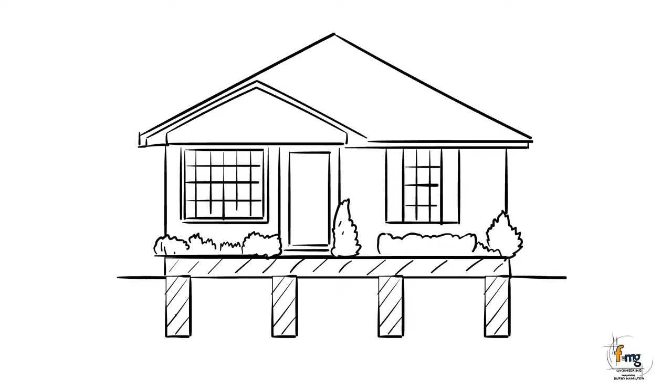In our first video about footings, we covered the basic principles of footing technology. In this animation, we will be focusing in more detail about the many different kinds of footings available today.

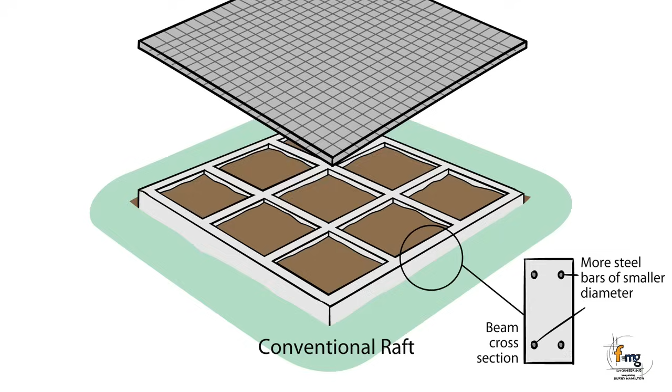The conventional raft system is a grid of concrete beams with steel inside that supports a concrete slab. The combination of a grid of concrete beams and an integrated slab on top is designed to form a rigid platform that resists the movement of the reactive clays underneath. Trenches are dug into the ground to form the grid shape in which steel is placed and concrete poured into to create the footing system. Pros: most common footing type for brick veneer dwellings. Great for reactive soils. Good on low-bearing soils. Has an integrated slab.

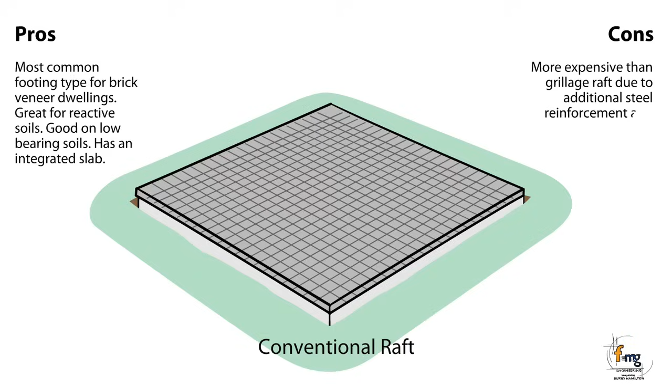Cons: more expensive than Grillage Raft due to additional steel reinforcement and concrete.

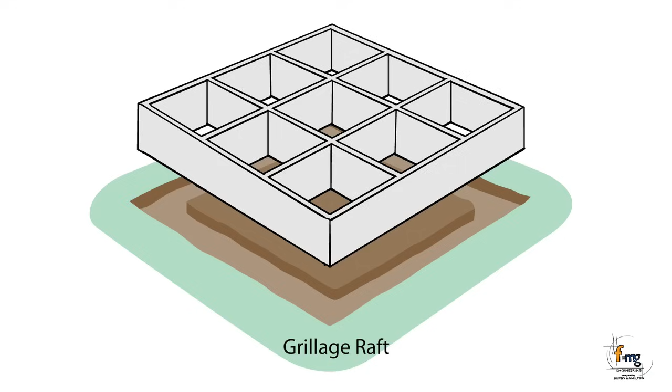The Grillage Raft system is much like the conventional raft. However, the beams are slightly narrower, deeper, and contain less concrete and fewer, but larger steel bars. A Grillage Raft has a more efficient design, but can be more difficult to construct due to the deeper and narrower beam.

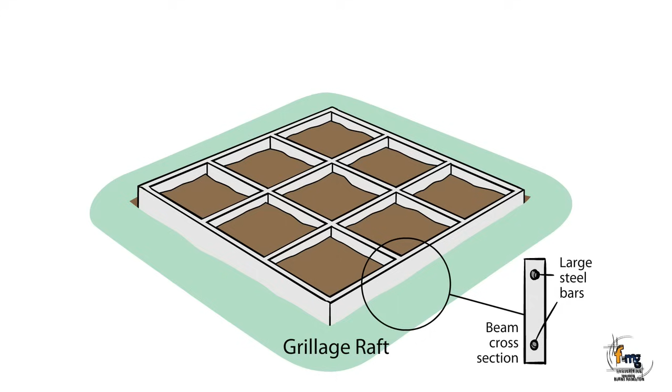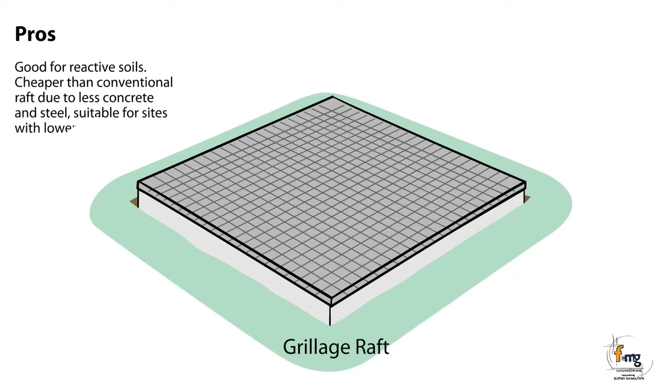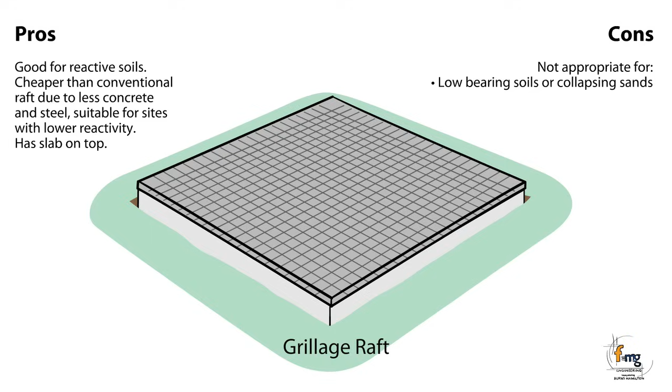Pros: good for reactive soils, cheaper than conventional raft due to less concrete and steel, suitable for sites with lower reactivity, has slab on top. Cons: not appropriate for low-bearing soils or collapsing sands, sites with shallow rock, sites with loose fill.

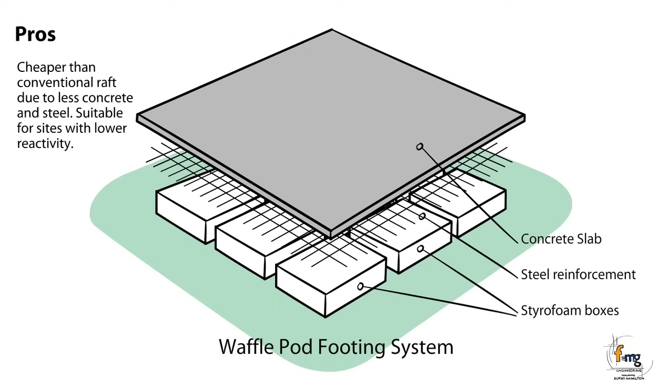The Waffle pod footing system is a grid of relatively narrow concrete and steel beams formed entirely above the ground using styrofoam boxes as formwork. Boxes vary in height from 225mm to 400mm depending on the soil reactivity on the site. Pros: cheaper than conventional raft due to less concrete and steel. Suitable for sites with lower reactivity, little or no excavation required.

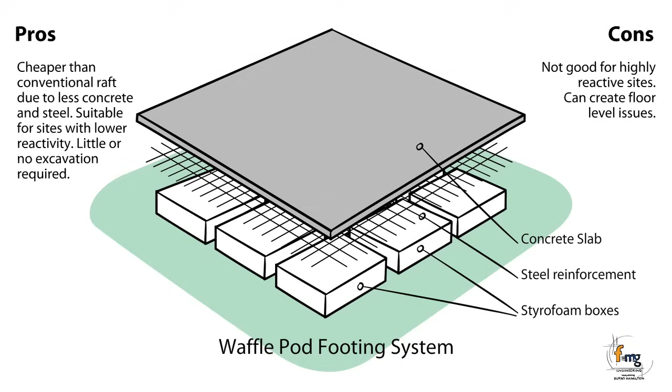Cons: not good for highly reactive sites. Can create floor level issues. Can be visually unappealing.

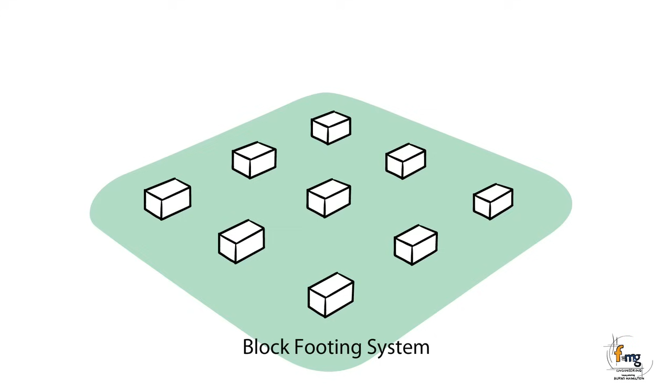The block footing system is a series of concrete blocks that are stacked and bear either directly onto firm natural ground or on concrete pads that bear onto firm natural ground.

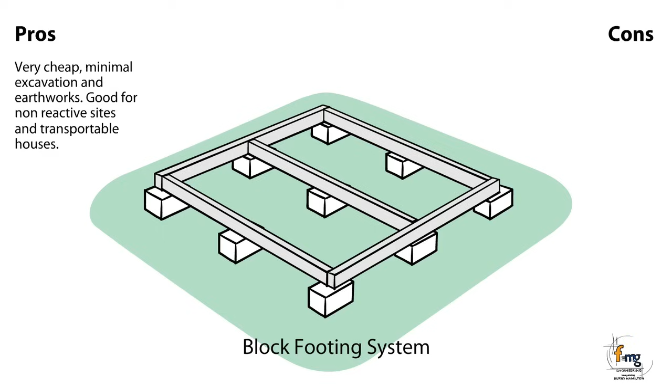Pros: very cheap, minimal excavation and earthworks. Good for non-reactive sites and transportable houses. Cons: only suitable for lightweight timber frame dwellings. Not good for reactive sites. Floor level will be higher than outside ground level.

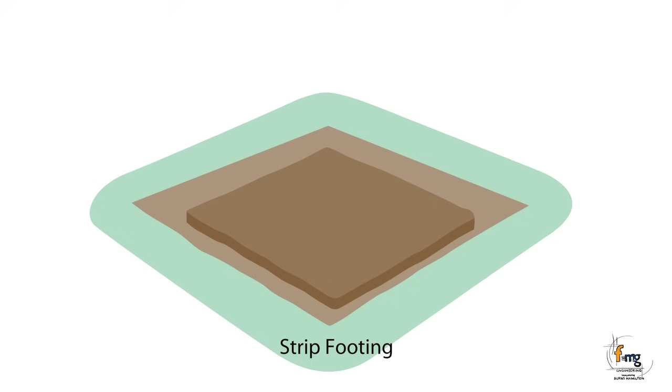A strip footing system uses concrete beams with steel reinforcement. Beams can form a grid if desired to improve overall strength of the footing system. Generally used to support a continuous wall or a dwelling with timber floors, similar to block footings but with more strength to resist soil movement.

Pros: cheaper than conventional raft footings. Cons: does not have a slab on top to construct level flooring. More prone to movement than slab footings.

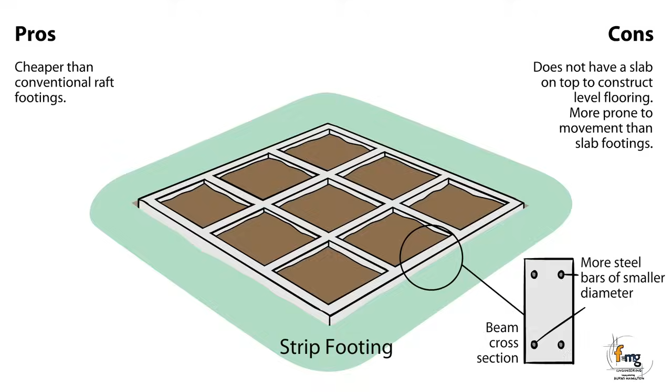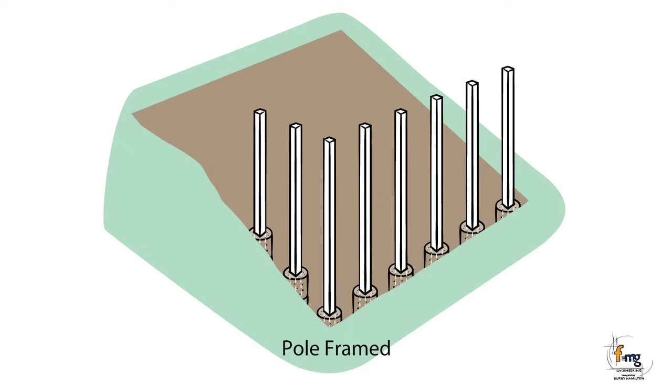The pole frame is a series of poles ranging from 0.7 meters to 3 meters that support a generally lightweight structure above. Pros: good for steep sites, minimize earthworks on steep sites, allows for construction on normally unbuildable sites due to slope. Good for sites with shallow rock.

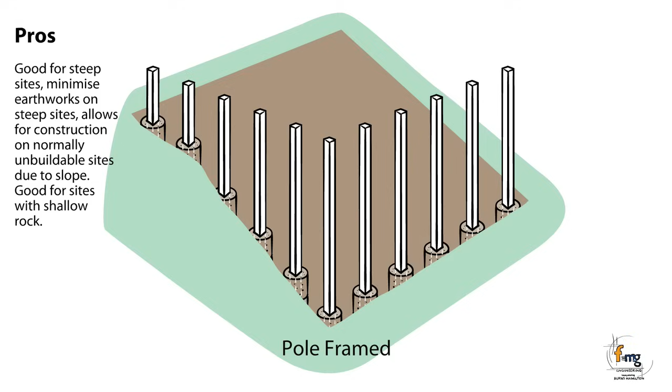Cons: generally only suitable for timber frame dwellings and therefore not energy efficient. Aesthetics not great depending on preference. Not good for reactive sites.

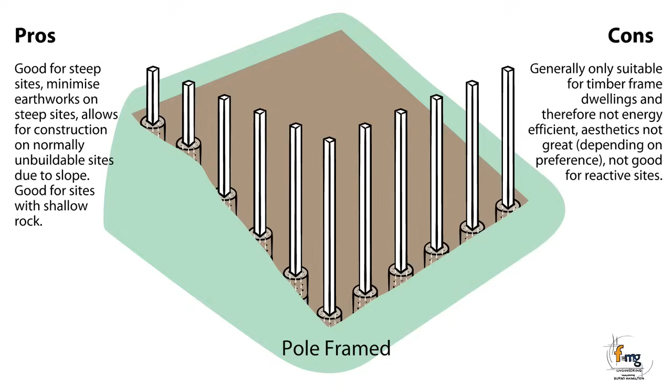The poles bear onto a concrete footing. A close-up of the pole explains how it is supported on the ground and sits on the concrete footing.

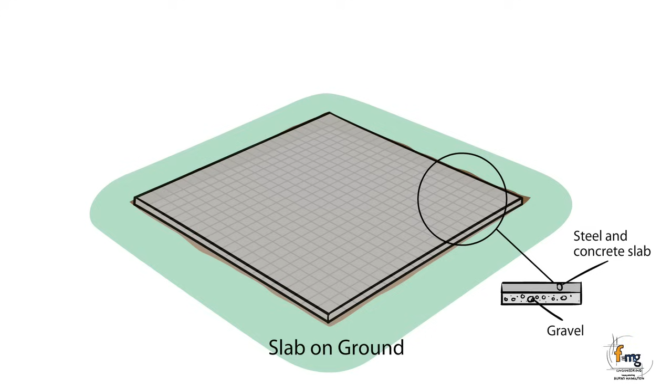The basic slab on ground is a concrete slab with steel reinforcement. This is only used for highly flexible structures such as sheds on less reactive sites. The slab on the ground is not designed to resist soil movement. Pros: very cheap, minimal excavation required. Cons: not good for reactive soils.

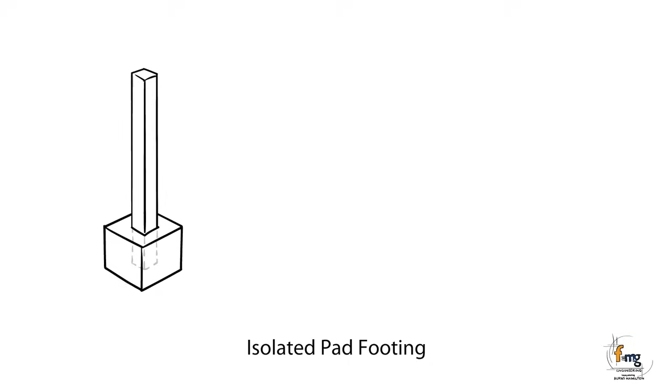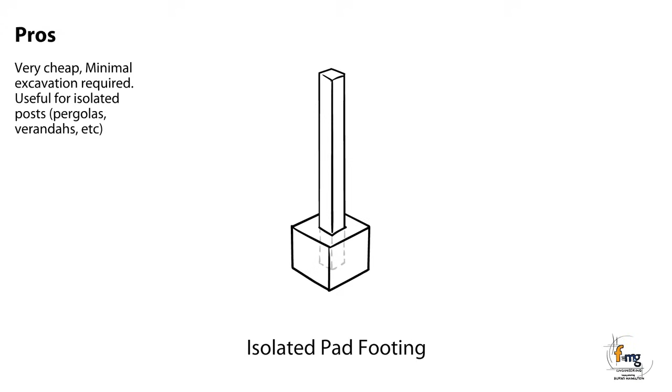Isolated pad footings are concrete pads with steel reinforcement, used to support single columns rather than continuous walls. Pros: very cheap, minimal excavation required, useful for isolated posts, pergolas, verandas, etc. Cons: not good for reactive soils or movement-sensitive structures.